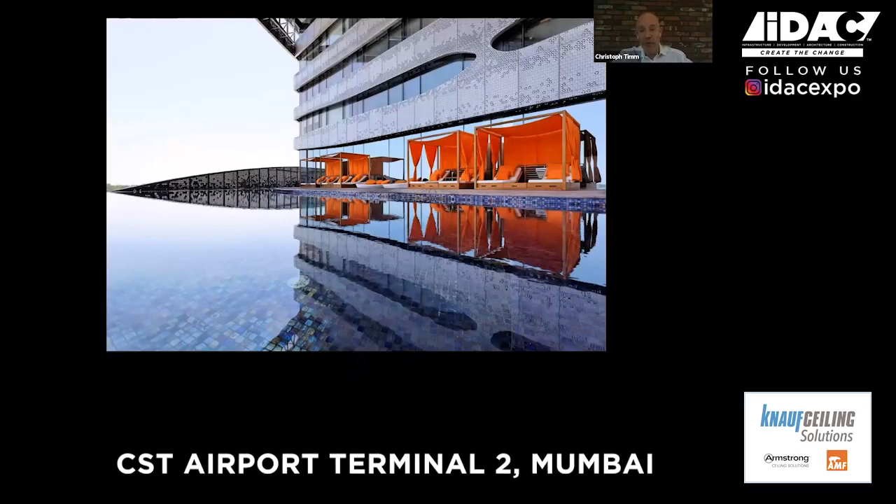Secondly, you have a project of that magnitude in a foreign country where you haven't built before. SOM, for example, has executed work successfully in Hyderabad with the Park Hotel there. However, we hadn't worked on a project of that magnitude in India before, back in 2007. That was a challenge that came to our mind as well. However, given our experience with projects all around the world, we were ready and willing to take this on.

One of the things that makes our airports special is giving them a sense of place. An airport in San Francisco shouldn't look like an airport in Mumbai, Tel Aviv, or Manila. An airport, in our opinion, has to have a genius loci - something that relates it to where it is. And coming back to Sanjay's strong personality, this was the perfect client for us, because he had that vision and was committed to it.

To answer your third question about what the expression is, I think it's both what you were mentioning - the economic power and the technological strength of the country, for sure. But thirdly, this is shown by the sheer need to improve the capacity of the existing terminal. At the time, in 2006-2007, Mumbai terminal was seeing like 20% increases year to year in passenger numbers. So there was a real need, and that need is a manifestation of India's economic development over the last 15, 20 years.

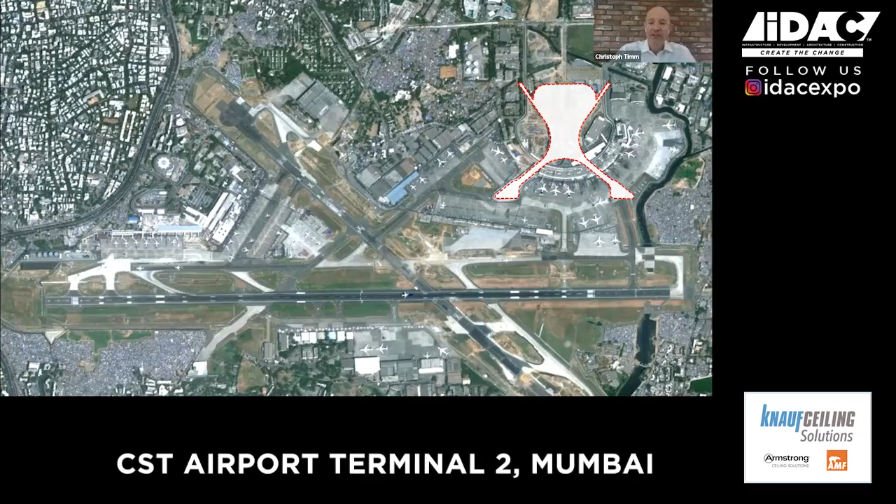A cardinal rule for us at SOM is phasing. A project has to be phasable, especially one that happens in the middle of a city. You have to make sure you don't just have a beautiful design, but that you can build it while an old airport, an old structure, is still operational. We always say, if you don't have phasing, you don't have design.

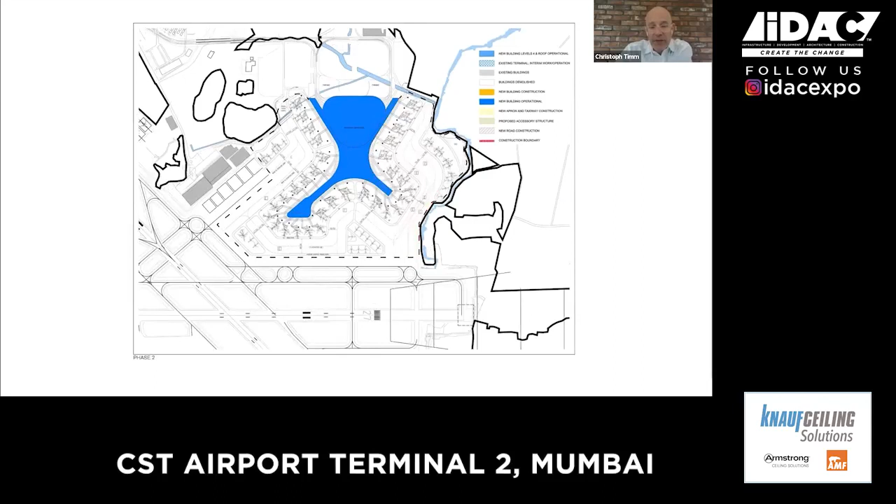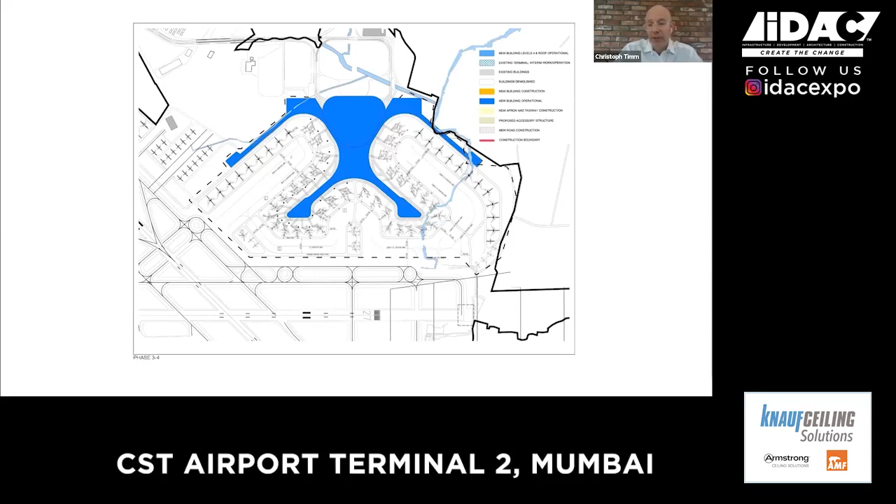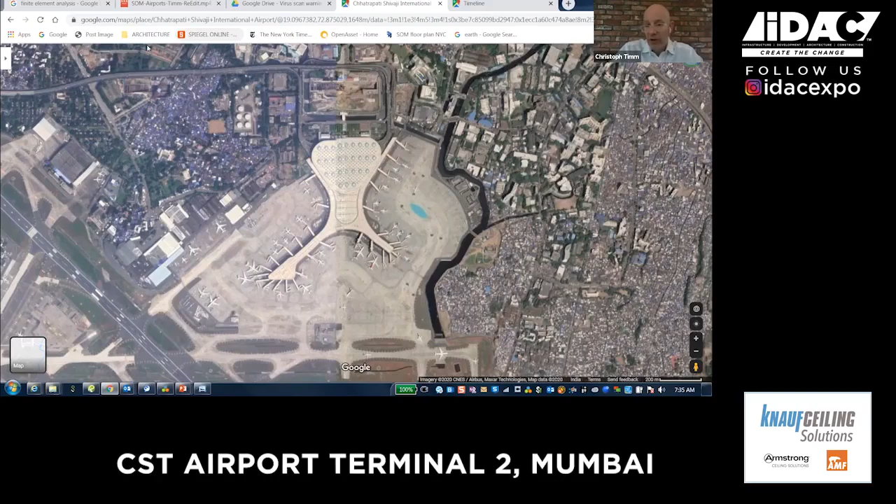For now it looks like this, and I think the general public doesn't really understand, from visiting day to day, that the airport is almost a living organism. Its shape and design could still evolve, and we have plans for that, and we'll see how the future shows it evolving. I used to always think the actual size of the terminal is much bigger than the number of gates, so now I understand why that is.

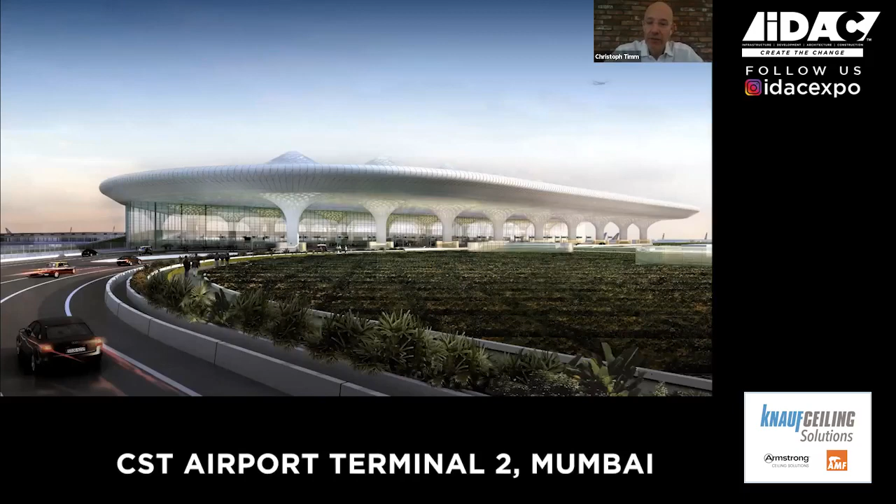So I think it's kind of nice to take you through the experience of arriving at this airport and how you make your way to the gates, because it's critical that the airport doesn't just look good, it has to function and has to work. Airports to us have a lot to do with intuitive design, so people find their way nicely without having to ask questions. Their view is always kind of choreographed, so they know where they have to go next. That's certainly a critical design feature we try to achieve on all our projects.

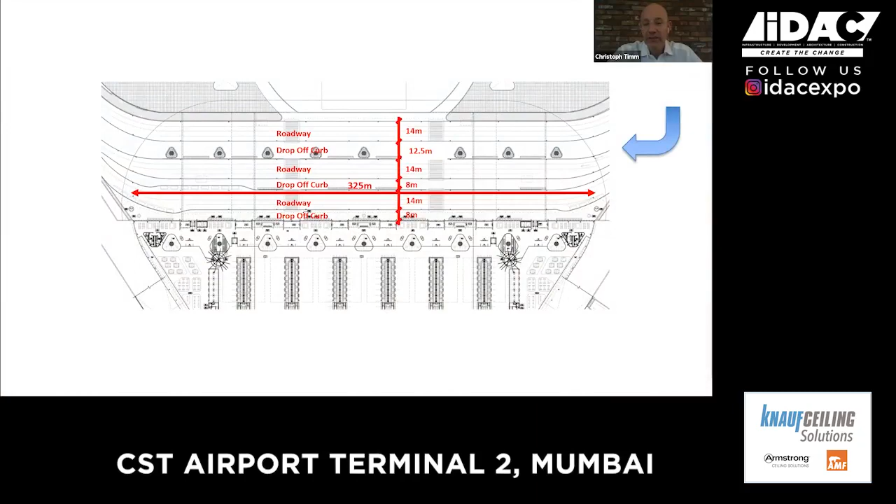So let me walk you through how a user may experience this building. First, after arrival, you have this gigantic drop-off area, over 300 meters long, 70 meters wide. It's quite an experience, but it's very simple to know where to go. You can see those golden vestibule areas that punch through this cable net wall over 300 meters long, so it's pretty intuitive. You get it.

Once you pass through the vestibules, you already see where you have to go - there's the check-ins, you have a clear understanding of what happens next. It takes stress out of people because, as you mentioned, you use this airport all the time, but there's a lot of people who don't. There's a lot of people who travel once in a while, and travel can be stressful. So the more visual information, visual clues you give to people on how to make their way through a big building like this, the better it is.

So here, this is the change from the 4th floor to the 3rd floor as you go to your gate. You have some changes in direction - this is what I showed earlier, this was the international departure. If you go to the domestic departure, there are some changes if you want to go up to the north piers of this X. But again, we're trying to always guide the eye of the passenger towards the next step and make that very clear.

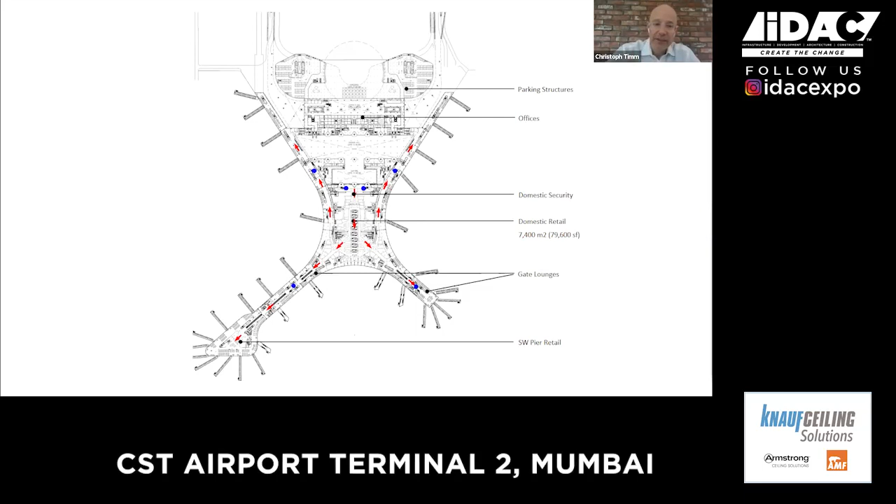And what helps us with that is oftentimes light - we like to direct with light. So a lot of daylight, natural daylight throughout the terminal, as you know. You see the coffers here on the ceiling, that's all daylight. We also have this continuous curtain wall, high performance glass curtain wall on the sides that comes in. The people mover makes you get faster to the gates, of course. And then there are screens here and there that protect the user as much as possible from glare, and the building also from the higher solar loads that come with all this glass.

So this is how you arrive at your gate - this is the experience. This is hopefully what we think is making this project extremely successful in wayfinding for the individual user, for the common man who goes through this, not the everyday user like you are maybe.

No, even for the first time when I went there, I didn't have to ask anybody. The flow is so simple, as you rightly said. You don't have to ask anybody. It has got so many spaces and detailing.

So how many consultants and agencies were involved in the design and build? There is a whole series of consultants that we work with. Of course, there are the typical ones - structural engineers, mechanical engineers - but there are also very critical consultants to us who are wayfinding and signage specialists. There's landscaping that we have to work with. There are a lot of security requirements, so we have security consultants and security government agencies that have a huge say on how things have to be choreographed. There are also other agencies that control how an airport is run, basically where the access points are and who can go through them. This government agency in India specifically is called BCAS, and they are extremely powerful - they have to sign off on all your ideas and designs that you want to try out or construct.

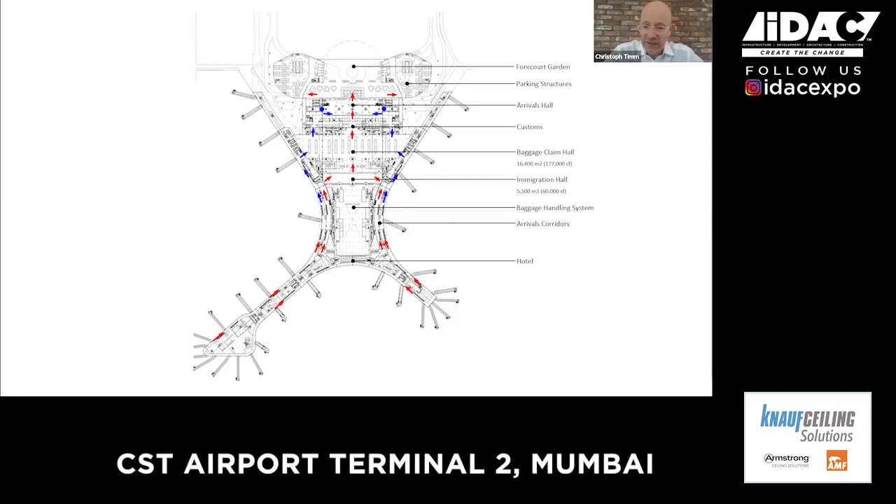I have to correct you a little bit - taxi pickup is on the floor below. Taxi pickup is immediately at curbside on ground level. So if you wanted to take a taxi, you could just exit the building and jump in the cab. I understand, I think you meant private car pickup - that, unfortunately, is not allowed at this point. But it will be, there's a potential that at one point it may be allowed. We are lobbying for this. But the bigger idea behind this is...

When you exit the terminal, the building, the idea is to have a kind of Italian piazza there, with nothing like no honking cars and loud craziness that you see elsewhere. The experience is heavenly. So once you come out of the terminal, those 5 seconds you feel like coming home, and that environment is too good - there is no second thought.

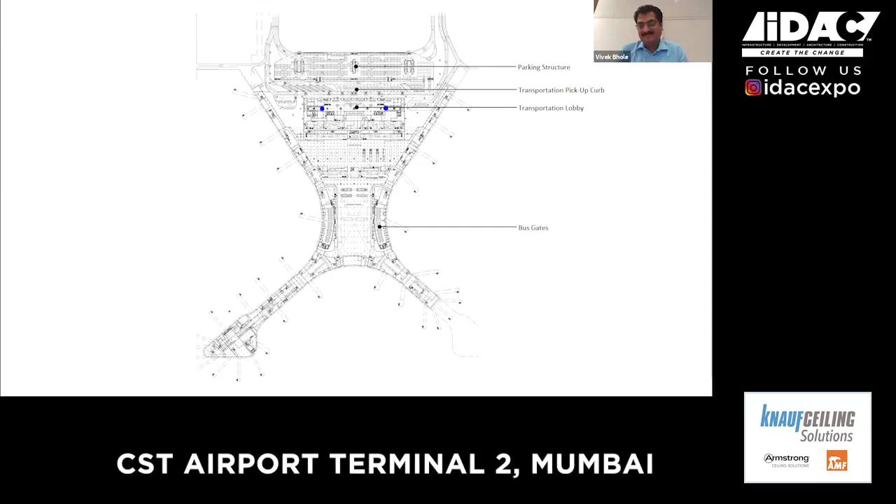Yeah, absolutely. I understand for people that travel every day, twice a week or whatever, it's kind of annoying, I get that. But like I say, that would be remediated if the level 1 pickup was changed, and the private car could just pull up and you jump in and go. And then the regular tourist who comes to India for the first time steps out onto this piazza and gets a nice welcoming touch and feel as well.

One last point is also that the metro is being built. I'm not sure what the schedule on the metro is, but having access from level 2 to the metro will hopefully increase ridership, with people using public transportation, and tie the second level into a more commuting-easy connection there. Yeah, absolutely.

Okay, I saw your slide with Mr. Sanjay Reddy, and I want to know how much was your client's involvement, or maybe from the client side, the managers or those who are influencers into the selection of the material and design.

Yeah, his involvement was tremendous. He and his team were there along the way all the time. I don't want to say pushing, that sounds too negative, but he was certainly there with his opinion, with his vision that he had, and so that was a challenge, but a good challenge. We embraced it.

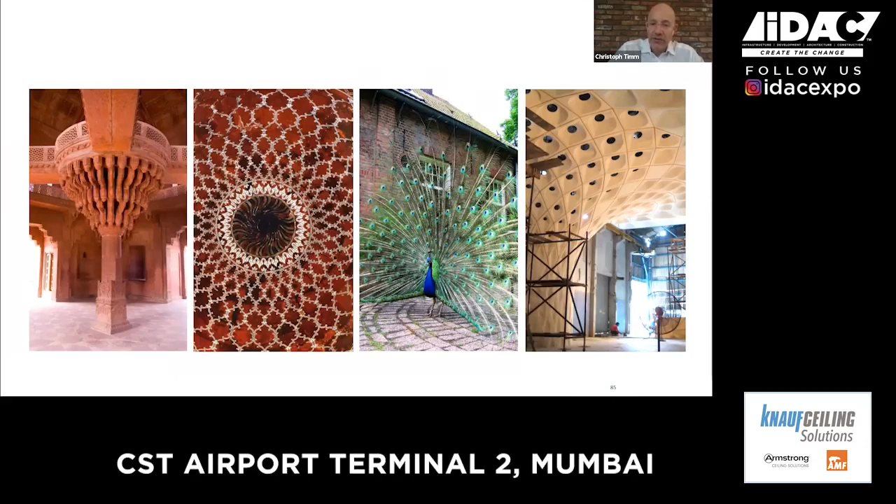A lot of what you see on the project really is in direct lineage of this trip. For example, the main feature of the building, the terminal roof, is so inspired by the national bird of India, the peacock. It straight comes out of this trip. So he was very, very hands-on, educating us, introducing us to these crafts, to interesting traditional architecture in India, and I think the building reflects it. So yeah, I showed these pictures in January.

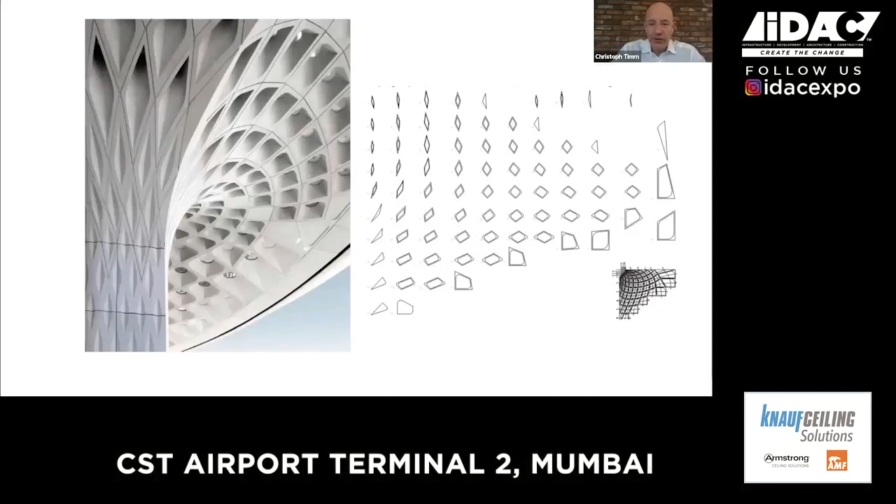How these relatively simple, from a construction technology standpoint, concrete and steel columns are clad, what beautiful shapes we get, and if you squint your eyes, you can almost think this is a peacock here. And the installation and all the parametrics I talked about before - this is recognized, you find it on stamps because it's so special, this building and this treatment, or also on Instagram, which we see more and more being like the gauge for what makes things or spaces actually attractive to people and popular.

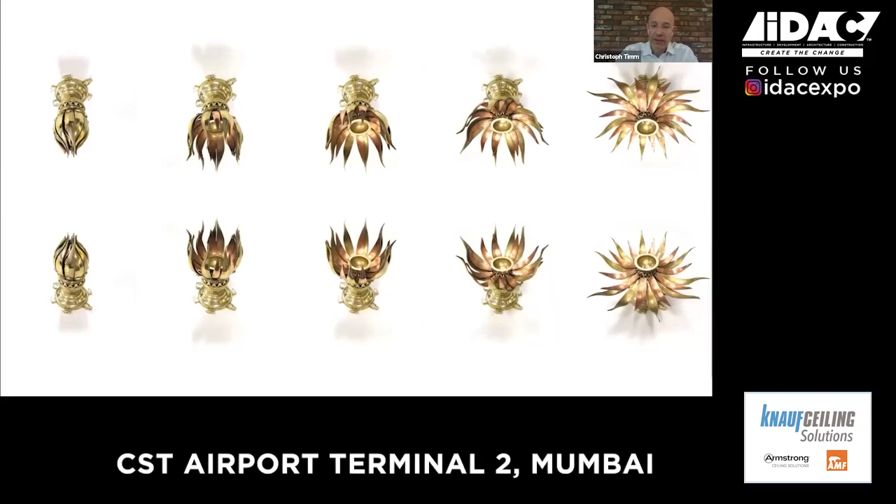So Sanjay, together with us, developed a few features, besides also the ceiling that is inspired by Indian heritage, I would say. For example, these chandeliers that you see throughout the terminals - I think there's thousands of them - and it's a one-off, it's a custom feature.

We also have in the arrivals immigration area this wall that is inspired by diya lamps with this motif. We have also the pods in the departure in the head house, these pods that are similar to the roof, inspired by the peacock parametric design, and the jali window maybe.

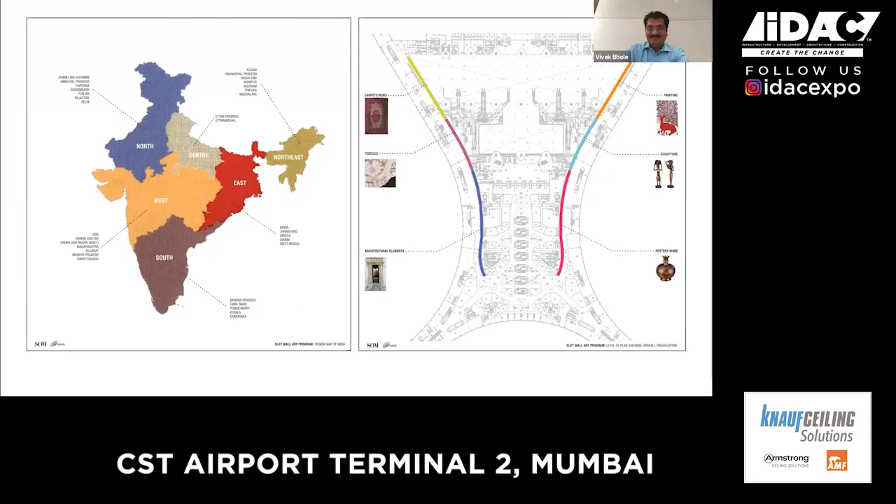We have on the facade, on the glass, these frit patterns, patterns that are inspired by fabric, textile, chikan patterns, embroidery. India is so well known for textile, so you'll find this on the glass as a ceramic frit. And all these walls, these regions of India are represented along this art wall inside the terminal. You can see it here color coded on the right hand side, and in plan where these different regions and different materials - 6 different regions - are represented.

There was a lot more that was developed together with Sanjay and the team. For example, a color scheme of coating the entire roof with 5 shades of white, as you can find in some traditional literature. This didn't make it into the project.

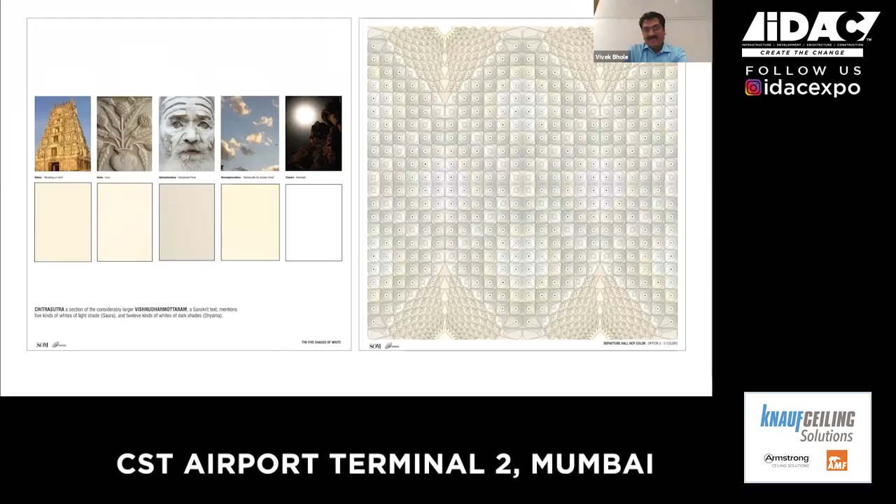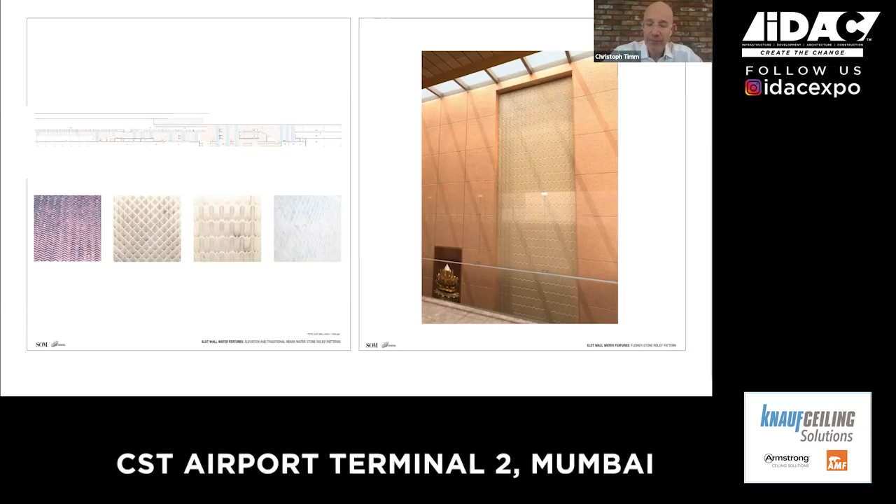We also had a feature of water walls that are not just for aesthetics, like sound and visual calming, but they would also have had a performance-based aspect, because they take down relative humidity in a space - believe it or not, contrary to what you would think. We've done this in the past, that waterfalls reduce relative humidity, but it didn't make it into the project.

We had also some tree of life patterns as a concept, also on the glass at the head house at the drop off, where we would have ceramic fritted the glass with these traditional motifs, but it just didn't make it into the project. So there was a whole lot more that you don't see nowadays in the project. But I think it's kind of interesting on an occasion like this to show this and make the audience understand that what you see is really a snapshot in time.

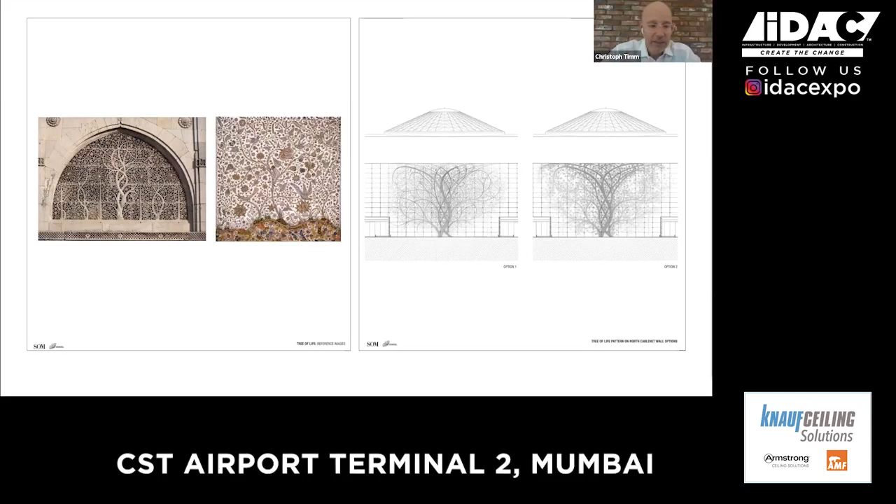What you see on the building is a snapshot in time, because some people made certain decisions. It could have looked slightly different here and there along the way, but it was really like a labor of love, by Sanjay and us, of course. A few more here before I end this.

We had also a scheme where the columns would be highlighted with some golden edges, but eventually this wasn't produced like this, these coffers.

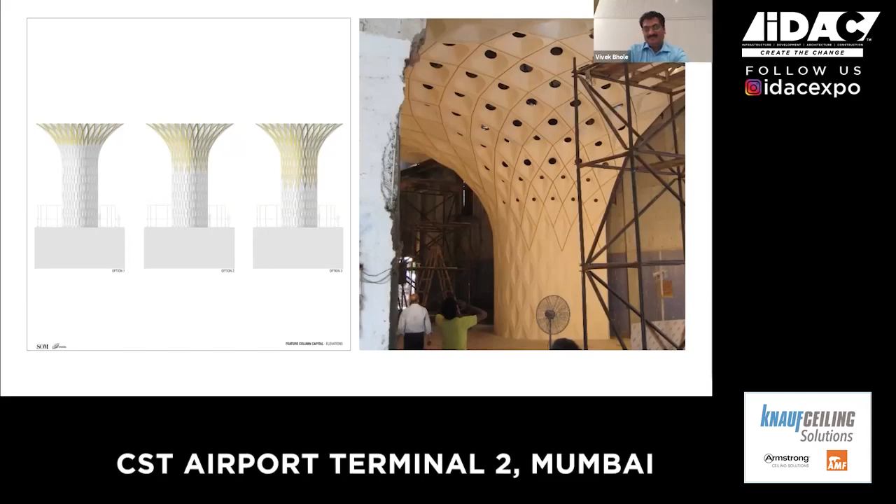We also had a lot more inlays in the glass at these punch-through areas of the gigantic columns. The glass was at one point designed to have reflective leaves in the inner layer, mirrors, and it didn't get executed. But you do see on the concrete, on the plaster wall, a little bit of this leaf pattern still, but the glass didn't get that.

So in summary, what I'm showing here is a small percentage only of all the ideas that came out of this collaboration of Sanjay, his team, and us, and this trip through India. I think we struck a good balance in the end, not to overload the building with these kinds of refinements, but I think it was great to do these exercises and then select a few specific highlights to implement in the project.

So they say for great buildings you require great clients, you know?

Oh, absolutely, I couldn't agree more. It's so critical, I've said it before, to work with clients who first of all have a vision, and then they are committed to the vision and they stick to it, and don't come undone at the first problem.

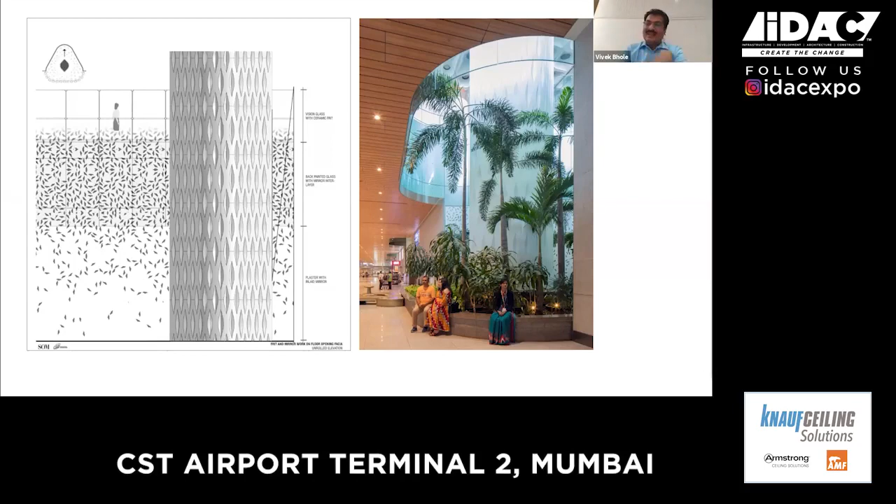One thing, last thing about Sanjay, certainly he's a great client, there's no doubt about it. You are praising him so much, but then when you select out of so many options, what was the policy? Either you convince me or I convince you, was that the policy, or I put my hand on this?

I wasn't there for some of these decisions, but I would think this was a team decision, that together we all made this decision at that point. Maybe some people had personal preferences about some of the ideas, but I've never been told this was a decision made by one person alone. It was a team decision and a balancing, and it has come out wonderfully well. So it cannot be just one person's decision.

And all that crafted wall on the arrival is there, you know. Even in the departure areas you have got those artifacts. All those walls, you see a lot of effort and detailing there, and that exactly depicts the culture of India. And you rightly said, you must have taken a lot of effort along with your client.

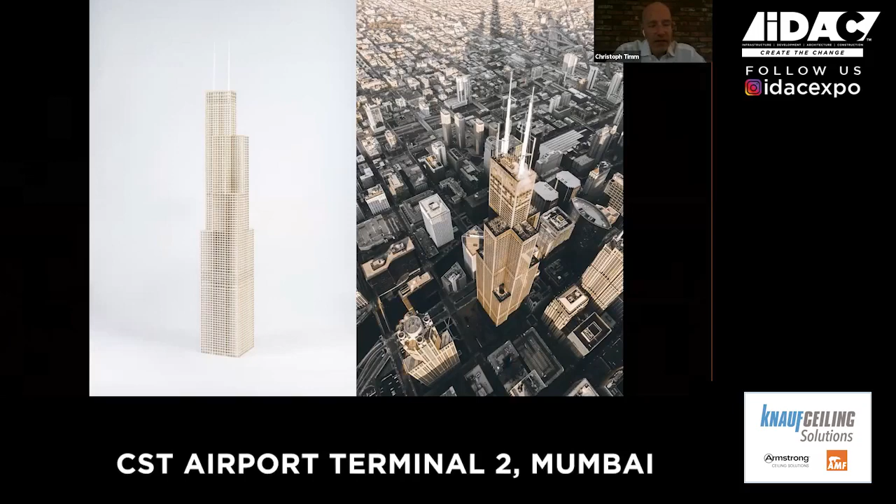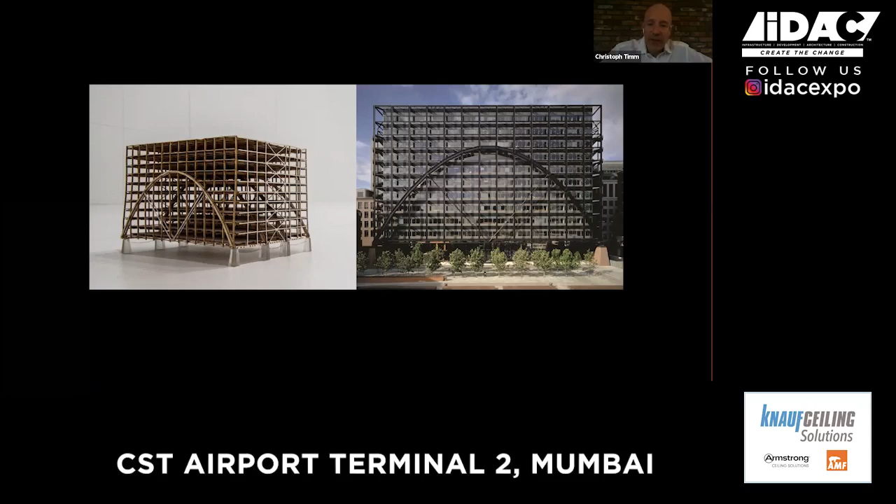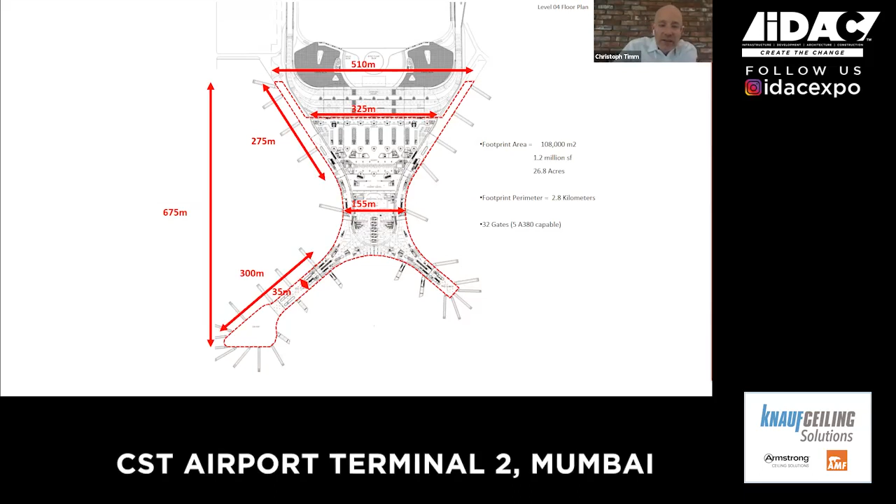Let me talk about a few specifics on the T2 terminal here in Mumbai, just to get an idea real quick of the dimensions - the incredible dimensions of this project. Overall, you can see the numbers on the screen, unbelievable if you think about it. There are various column grids very carefully integrated into the architecture, with different color codes you can see here.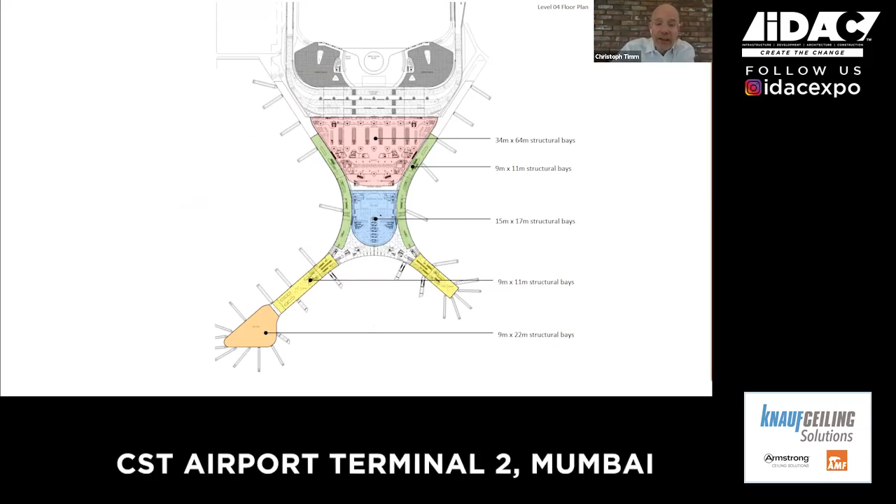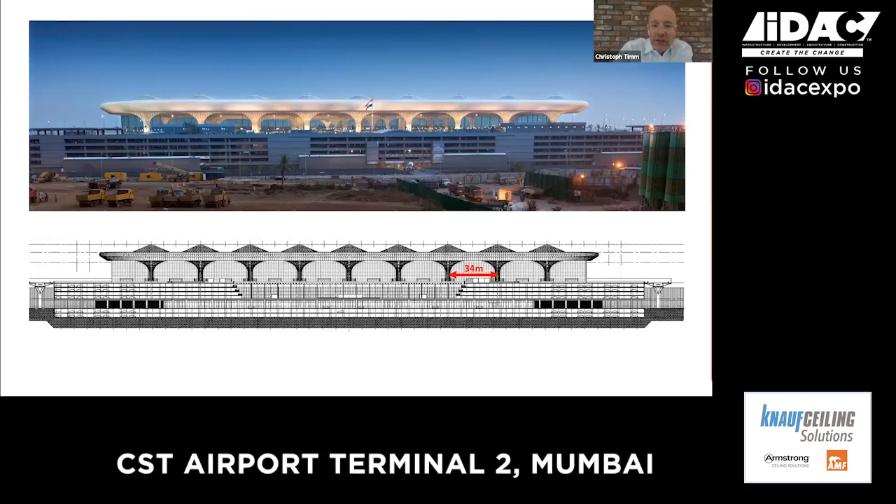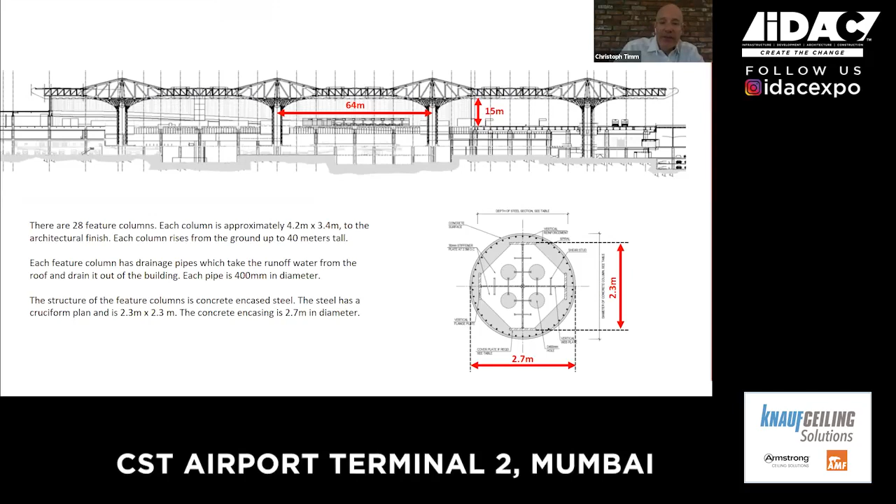First and foremost important is the head house with its double span roof geometry, structural geometry. In one direction it's 34 meters, and in the other direction it's 64 meters, spanned 15 meters above the departure drop-off area. The columns are majestic there - you can see just the sheer size. The structural columns are over 3 meters, almost 3 meters in diameter, and then they are clad. There's a total of 28 of these columns, and they are at times cantilevering 40 meters up from the ground. Incredible feature.

And all of this construction is relatively simple, because with these kinds of quantities, you don't want very time-consuming detailing, especially since all the steel is being clad up. So these are relatively straightforward, simple details we utilized here for the steel, and the concrete is what it is. The dimensions are just incredible.

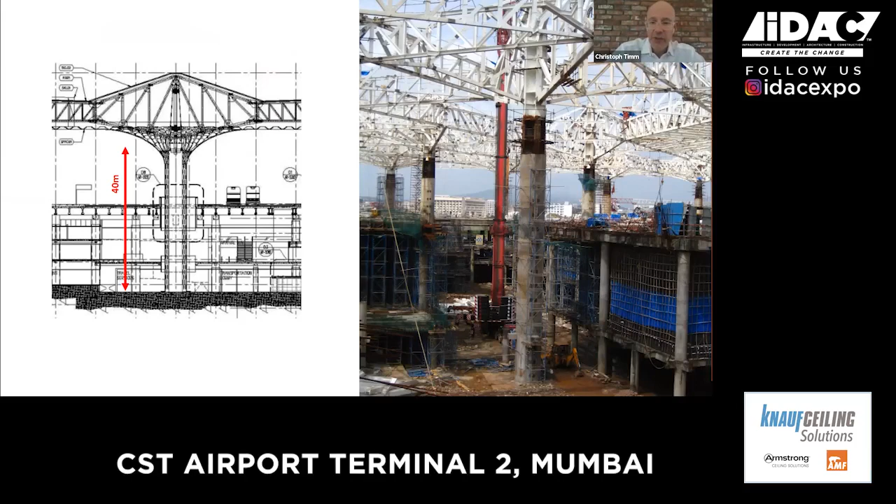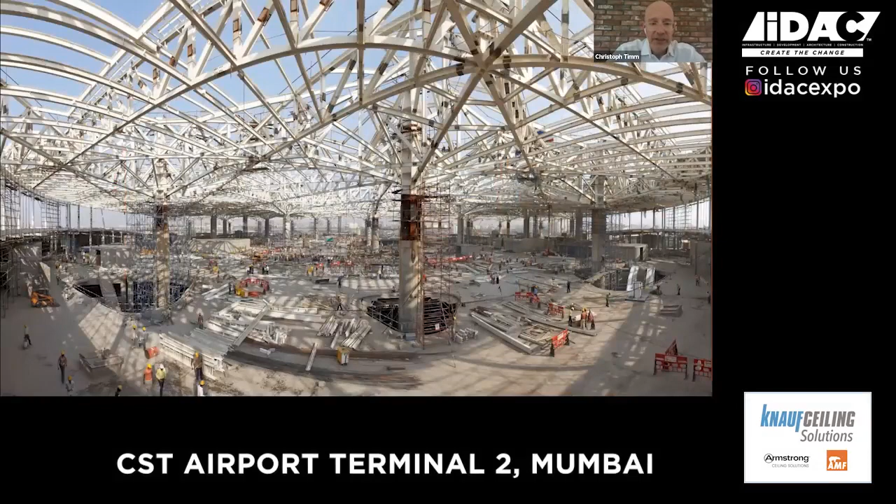But kudos to SOM, who managed to come up with this design and have this hovering lattice work of steel here. Incredible feature. We have these skylights that fit into the steel and bring down light to reduce solar loads due to electric lighting throughout the head house.

The structure, the roof that floats over these columns, is actually just one structural unit. There's no expansion joint whatsoever. It's just one system.

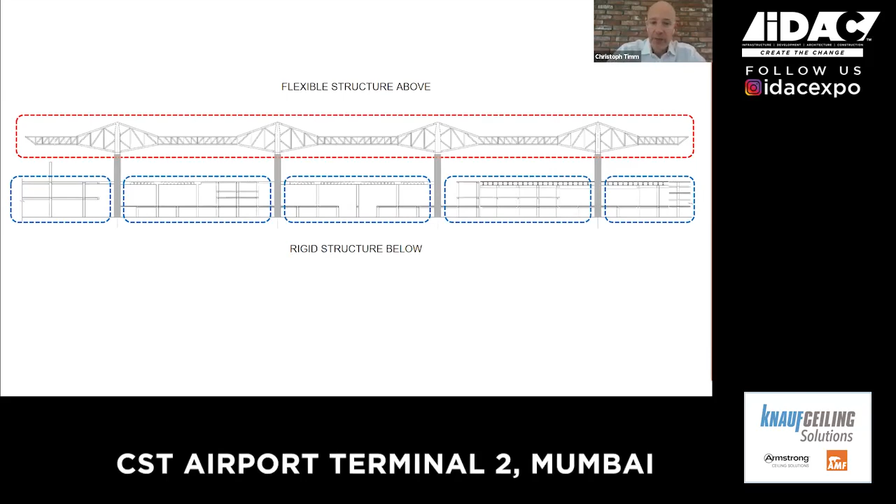As illustrated in the slide here, the blue box, the concrete below is actually broken up into expansion joints. Next time you're at the terminal, you can see in the stone these expansion joints—they are visible in the stone. You'll see it, but it's pretty remarkable how the structure came together as a single element, the steel, with these kinds of dimensions.

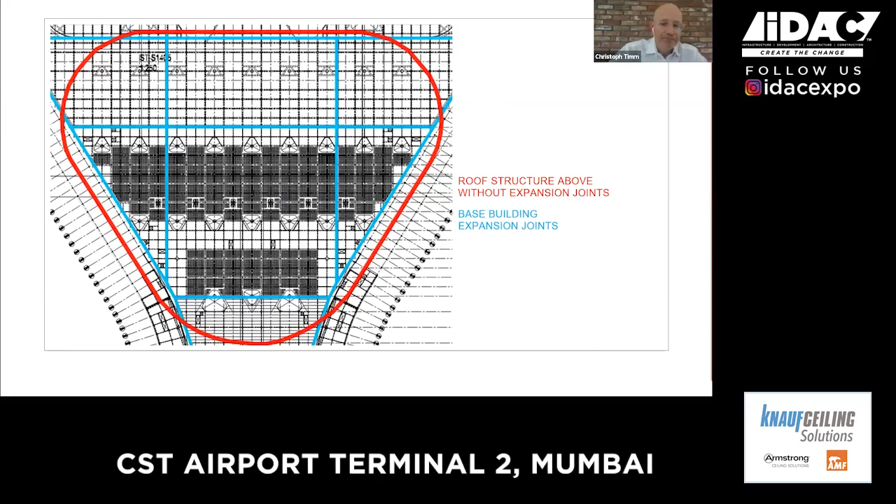Good. So next time whenever I go to this terminal, I'll look at it in a different way now. Now I got two more questions for you.

Mumbai is coming up with a new airport at Navi Mumbai, very near. So what do you think is the future of the T2 terminal after this new terminal becomes functional? Whether this will be just a domestic terminal or what they will do about it?

We believe that T2's projections are super good. Airline travel will continue to grow once we go past that bump of COVID, we believe. We're very optimistic that once there is a vaccine in place, business will not be as it was maybe a year ago, but traveler numbers will bounce back significantly. So we see that T2 has a very, very bright future. I think Navi Mumbai will compensate for some of these added new passengers in quantity.

I think T2 will definitely remain an international and domestic airport. Maybe the domestic part will slightly shift towards Navi Mumbai. Navi Mumbai will also be an international airport, but maybe the ratio of domestic versus international will be slightly different there than it is at T2. We've seen some of the airlines, especially low-cost airlines, going to T1 anyway. We think T2 has a very bright future here and will continue to see passenger numbers increase.